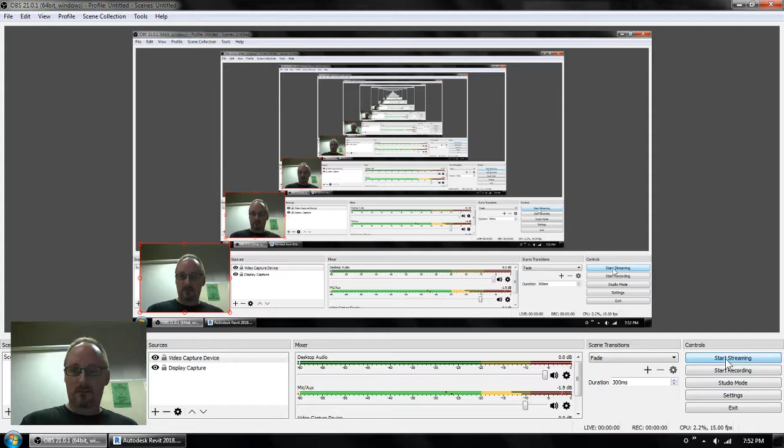In family types, we should have the metric and imperial level types created. And now we can go on to build the graphics. So if you haven't done that yet, you hit the new family types button here, and you're creating an imperial level type that has... so you have the imperial level type that's got the imperial level box checked, and then you have the metric level type which has the imperial level box unchecked, and metric will automatically be checked because of this formula.

All right, so hit OK, and now what we're going to do is build the graphic to the right of these labels. So if you look at the bottom of page 4, you can see what we're going to do. Now, while I am doing this, I'm going to go to the View tab, and I'm going to turn on Thin Lines mode. Now, I'll show you why.

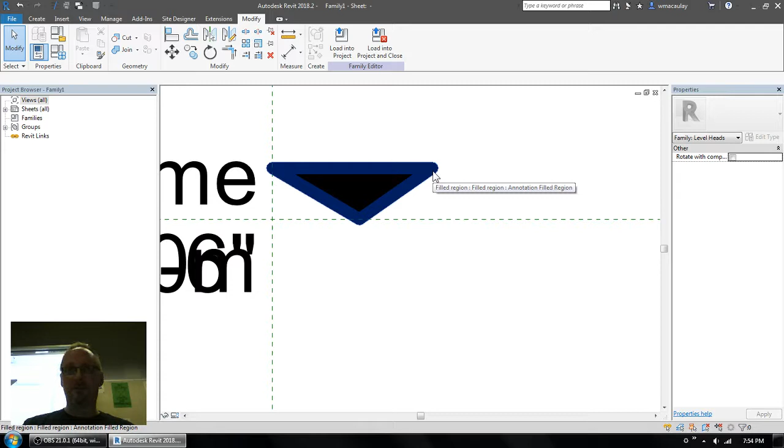The next thing we have to do, so just bear with me for a second here, keep your eyes on the screen. We're going to use the filled region command, and we're going to use the solid black filled region. But instead of level heads as the line style, we're going to use invisible lines. And here's why. If I make this triangle right now, you'll notice that the triangle has sort of rounded lines to it. And that's because when Revit does line work, it fillets based on the thickness of the line weight. Now, I don't want to fillet. I want that to be razor sharp, something you'd cut your finger on the end of it.

So what I'm going to do is, instead of using level heads as the line style, I'm going to use invisible lines. Now initially it's going to look just as blocky as the other ones, but when you finish, look at that. It's super sharp. But while you're drawing it, it does look pretty blocky, and that's a bit distracting. So what I can do is I can go to the View tab and turn on Thin Lines while I'm working on this. So as I'm working, we don't see any line weights, and everything just gets shown as a hairline. So let me show you the best way to get this drawn.

So go to the Create tab, start the Filled Region command, and then switch to the Invisible Lines subcategory for drawing these lines. Now we're going to draw the triangle first. We can't draw the triangle and a little bar at the same time, because the sketch lines would come to a point and Revit would freak out about that. So we have to draw the triangle and the little bar separately. So here's what we're going to do.

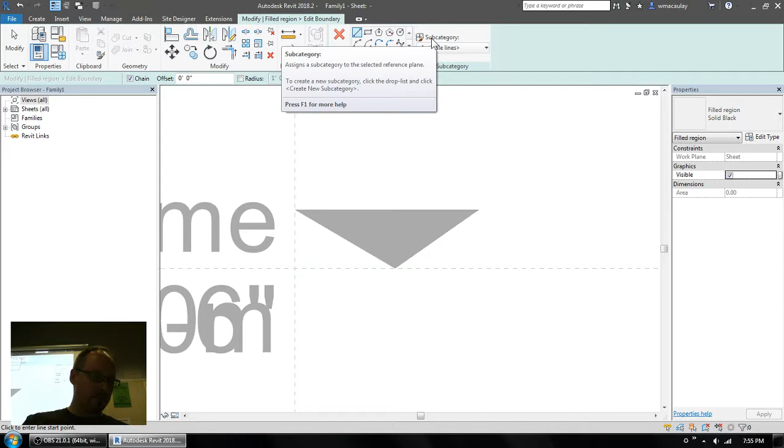We are going to switch to Invisible Lines, grab the Line tool, start right here at the intersection, and I'm going to draw up 1/8 of an inch, and then I'm going to come across 1/4 inch, so the reason I did this is just so that I'd have my triangle exactly where I want it. So I'm going to draw another line at the bottom across like so, and you'll see that it lines up. So I'm going to end up with a U-shaped series of these lines. So up 1/8 of an inch, over 1/4 of an inch, and then another one here at the bottom. Just allow me to snap to it.

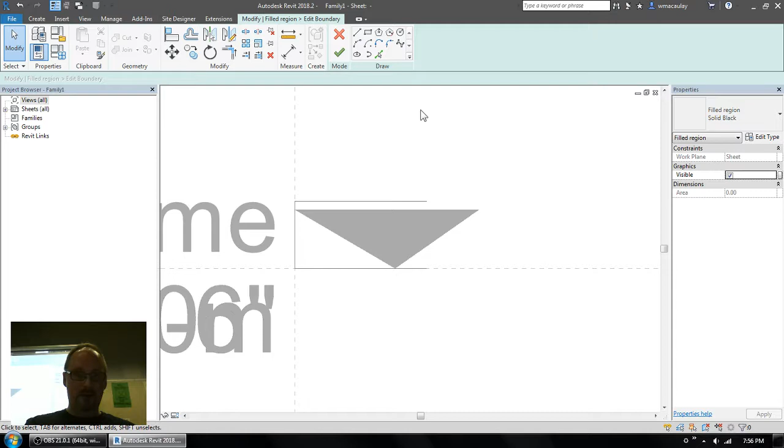So here I go. Now I'm really drawing the triangle from the end point to the midpoint, and then from the midpoint up to the corner of the triangle, and then I'm going to delete these other 2 lines, which were just there as construction lines to help me get started. So that's what we want to end up with. Invisible lines, and I changed to Thin Lines mode as well. So on the View tab, I've got Thin Lines turned on, and then when I'm drawing the filled region, I'm using the Invisible Lines subcategory.

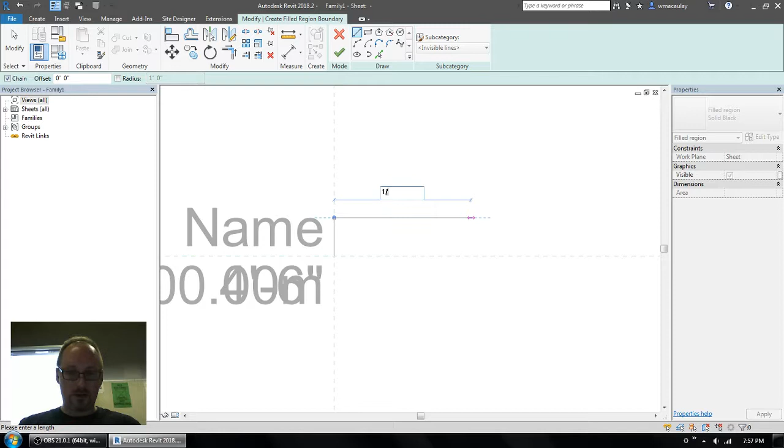So here I'll start right from scratch. So I'm going to draw from the intersection of the two reference planes. I'm going to go up 1/8 of an inch. Then I'm going to come over 1/4 inch. There we go. And I'm going to hit escape once, just once, because I'm still wanting to use lines. And I'm going to start at the intersection of two reference planes again and come over again 1/4 inch. Now the reason I'm doing this is I wanted to get these two construction lines in place so that when I draw the triangle, I'll have a midpoint that I can snap to.

There we go. And then I'm going to delete those two construction lines and finish. And there's my nice sharp graphic for a triangle, because I'm using invisible lines for the boundary edges of this solid hatched area. And then just draw the rectangle at the bottom, which will be quite easy.

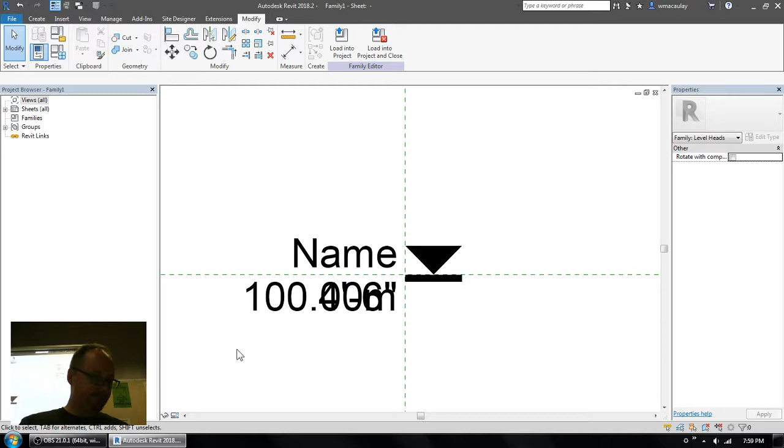Okay, so once this is done, you should have what you see up here, and we're going to save this as my level head. And so, bottom of page 4, please, we're going to put this into a project. So I've called it my level head and I've saved it.

So now what we need to do is use this in a real project. So just type Control N on your computer, and from the dialog that pops up, choose the architectural template. So Control N, and then choose architectural template out of the menu, and hit OK.

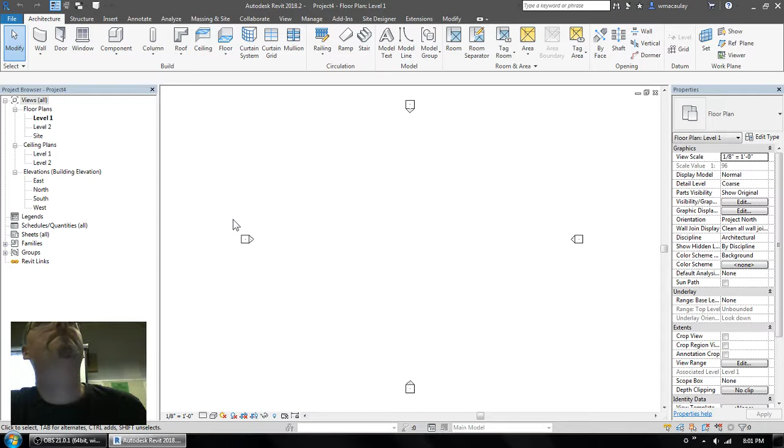Yeah. You can't. Revit, the shortest segment that Revit will let you draw is 1/32 of an inch. 1/32 of an inch. Yeah. So we just save on the desktop as a... Yep, my level head. Yep.

All right, so I've got this new project here, and what I'm going to do is I'm going to switch to one of the elevation views here. So I'm going to use my graphic instead of the one that you see here. So what I need to do is get that level head family and load it in here. So I'm going to go to Insert and Load Family and get it off the desktop here where I've got it. So there's my level head. I'm going to load it in.

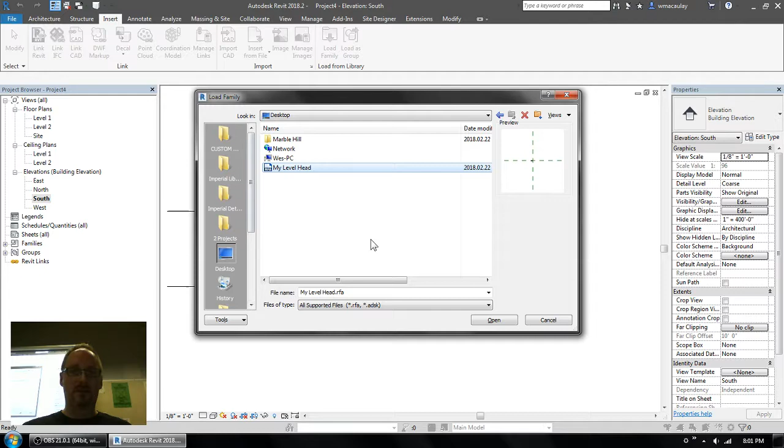So the level head is loaded, but it's not being used. So if I go into the families list and into annotation families, you will see my level head right there. So there's already 2 other level head families in this project which are probably being used. But at this point, we need to employ our newly loaded family here.

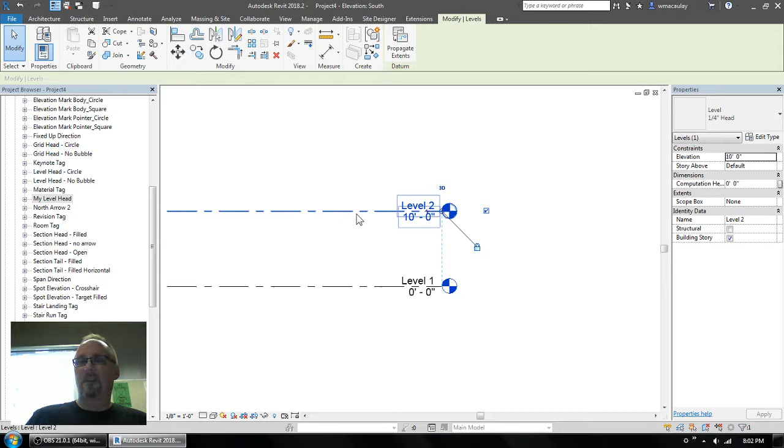So what I'm going to do is I'm going to go in and select one of these levels here. And we're going to make 2 level styles. One that shows metric, one that shows imperial. So first of all, we've already got an imperial level style here. So I'm going to go to Edit Type, and I'm going to rename this to Imperial Level. So I'm renaming the 1/4 inch head level style, and I'm renaming it to Imperial Level.

Now that I've done that, in the symbol parameter here, I'm going to go and find my level head right here, and we've already got one that's named Imperial Level, so when I choose this one and hit OK, our new graphic appears in its place.

Now what we also want to do is to have a metric version of this level. So what we're going to do, select one of those levels again in your view, go find Edit Type, and we're going to make a duplicate, and this one's going to be called Metric Level. So we've taken the Imperial Level and we've duplicated it, and we're going to call it Metric Level. For the Imperial one, we need to rename it, yes? Yeah, we do, just to help distinguish it one from the other.

So from the symbol field, it's still going to be the My Level Head family, but this time we're going to use the metric level type that we created inside the level head family. And hit OK. So now we have a metric level and we have an imperial level. So if we want our levels in the project to be in metric, there we go.

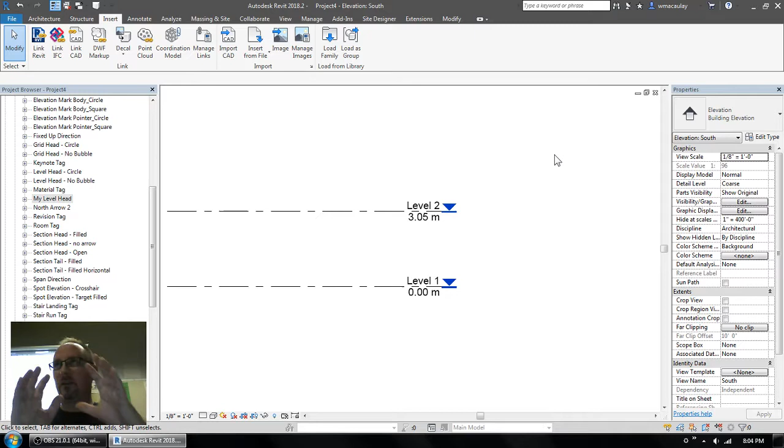Now, the purpose of this, folks, is to show you that you could, in the context of a single template, have a project that can be very readily switched into a metric style project using one family. So that one level head family is doing double duty. It's showing us meters when we want it to show meters, and it will show us feet and inches to the nearest 1/8 of an inch when we want it to do so.

So why do we go through all this trouble? Well, most commonly, when you do a project in metric, what basic unit do you use? Millimeters, right? So you usually use millimeters as the project unit, but commonly we don't use millimeters for the height of our levels, we use meters. It's more of an appropriate unit for the height of each story in our project.

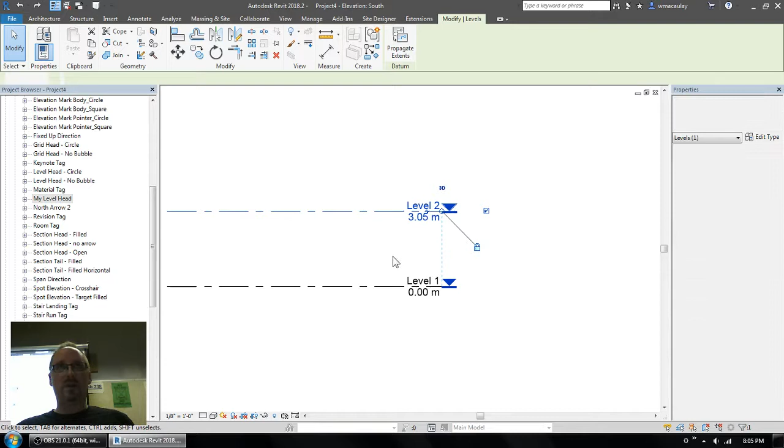So this means that if someone does switch the units of the project to millimeters, so here I go to Manage and then Project Units, and then switch it to millimeters here. So if the project gets switched to millimeters, the levels are still going to report their height in meters.

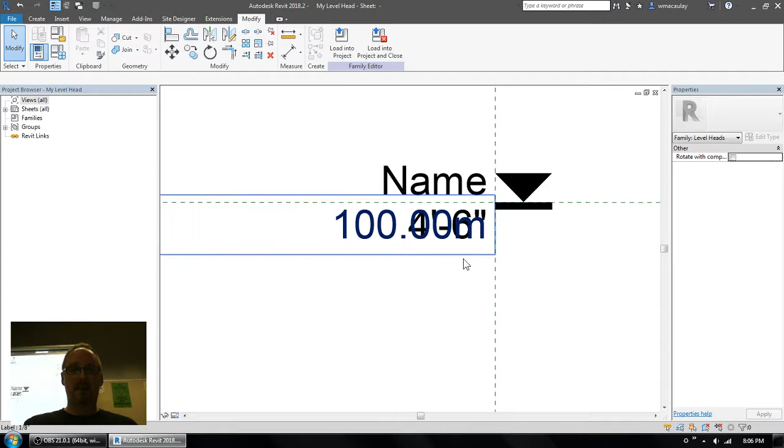So that's the intent. So most projects that I've seen report the height of their levels in meters. Now, of course, if you want it to report to 3 decimal places, what we'd have to do is go back to our family and then find our metric label here, go in and edit it, and change its units here to 3 decimal places instead of 2.

So if I change it to 3 and then load it back into my project, there you go. It shows 3 decimal places instead of 2. So that is something that's up to you. So if you want to, you can save, well, you need to save this in by next week's class.

Okay, we're going to move on. No, the project, because the family will be inside it. So here it says at the bottom of page 4, edit the levels type properties and change the symbol parameter to use this family, and then save the project as custom level head assignment in your share in folder. So that's that assignment done.

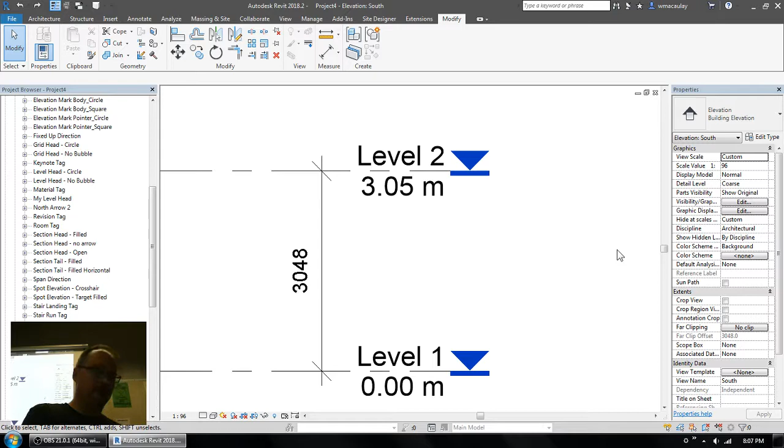Okay, I'll give you folks another minute or two just to wrap things up, and then we're going to move on to page 5. Okay, so what we're going to do is we're going to move on and talk about some of the other annotations that get used in your project. So close everything down to the Revit desktop so we can all start from scratch together. So save everything and then just go back down to the Revit desktop so we can all start from scratch using the architectural template.

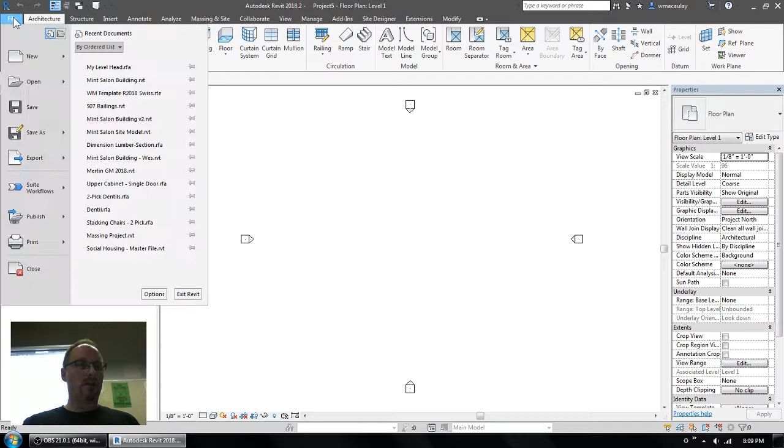Now, when you're trying to create the custom graphics for your office, what most people find is the easiest way to go is to start with your architectural template and then modify it to your requirements. So what I'll do here is I've got this architectural template open, and to start this whole process off, I'm going to go to the File menu, Save As, and Template. So this will be the ongoing project that you would embark upon to create your office's own template.

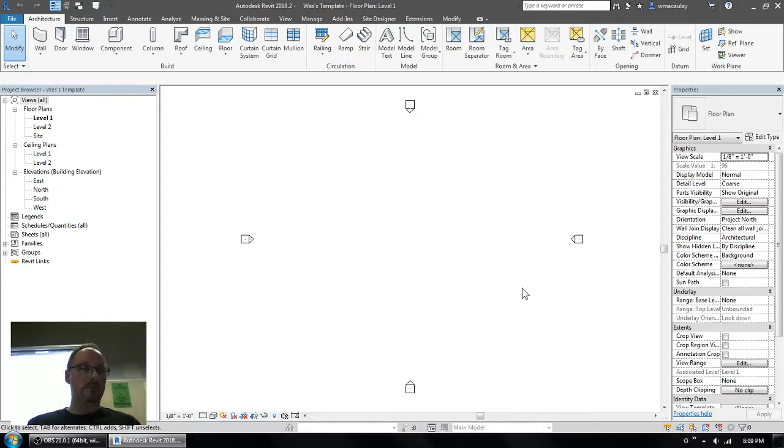So it might take you a few projects before you kind of figure out what you need to have in your template. But always have your template handy so that you can add stuff to it or make some modifications to it as time goes on. So typically what I have done when offices have needed me to get their graphics customized in the software is to take the families that are already here in the architectural template and modify them so that the office is happy with the appearance of these graphics. So let's look at grid heads on the top of page 5.

So when you use the grid tool, Revit creates a circle of a certain size and puts some text inside it. It's Arial font. All of Revit's graphics are based on the Arial typeface. So if you want to modify that, you have to address the family that's being used inside here. So if we go into the annotation symbols folder, we can go down and find the probable suspects in terms of how this grid bubble appears. So easiest thing to do, go into the template, find the family that's being used for the grid circle, right click and edit it.

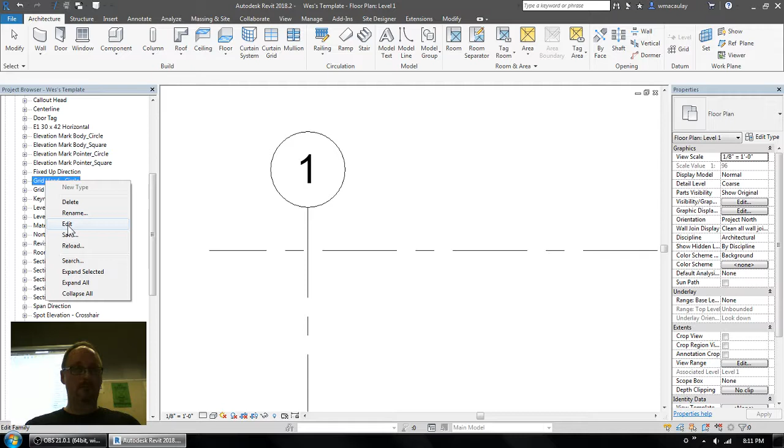Yeah, just open up the architectural template, and then I went down to the families folder, expanded it, found the annotation symbols folder, expanded it, and went down to the grid head circle family, right clicked on it and chose edit. So you folks can go ahead and do that. Now, when I make my grid bubbles, I like them to be noticeably heavier than the grid line. It just makes it easier to locate these grid heads in the drawings.

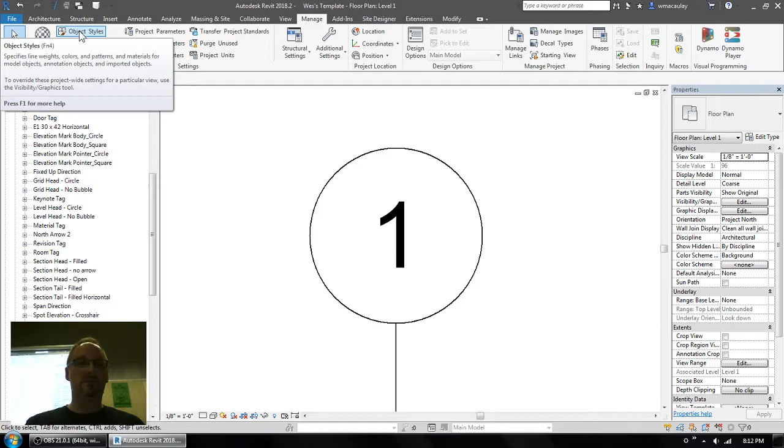So when I go and modify this grid now, this line around the outside, its line weight is driven by its subcategory. See it here? Grid heads. So if I were to go back and look in the project, I could find the line weight that's being used for grid heads. So I'm just going to tab back to the project here. So the line weight of your grid heads is controlled in object styles. Manage, Object Styles. So if I want to change the line weight of my grid bubble, I go into object styles and find the annotation tab, and then down under grid heads, you can see here, I'll change it to a line weight of 3.

So now you can see my grid heads have just a slightly heavier line weight, and I just find that when you look at a set of drawings and you see that little bit of extra line weight there, it just shows a little bit of attention to detail in terms of your graphics. Now, back when we're editing the grid head, the family itself also has object styles. So when I'm editing my annotations, if I go to the Manage tab, your families also have an Object Styles dialog box. But here's the thing.

If inside your grid head family, I went to Object Styles and I changed the line weight here and hit OK, you can see the line weight gets thicker around the edge of my grid number. But if I load this back into the project, it's not going to change the line weights. So here, I'm going to make it really quite thick, like a 6.

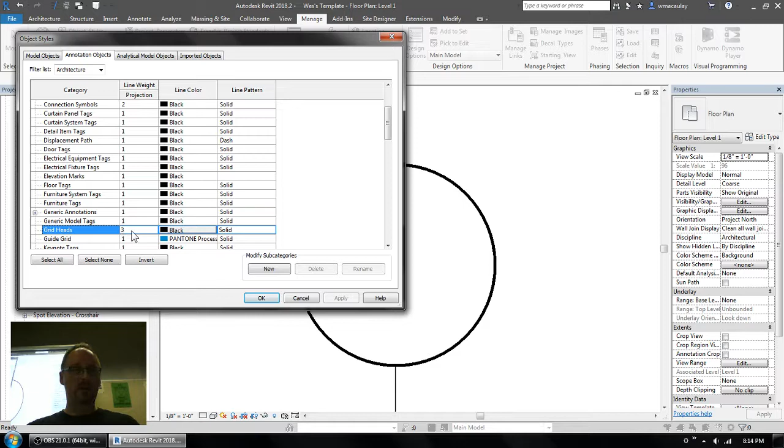Really thick. But when I load this back into the project, nothing changes. So what happens is the subcategory is still here in the project. So in my project, when I go to Object Styles and then I go to the Annotation Objects tab and then go down to Grid Heads, it didn't change it here. So just remember, if you want to change something, a line weight or something, you've got to do it in your project, not in the family.

So if you want to change something with your grid head, typically what you'll end up doing is maybe changing the radius of the circle. So you might find that 1/2 inch is too big a diameter. So if you want to make it a little bit smaller, you can. And then of course you can choose a different typeface and a different size for the text if you feel like this is too large.

So that font I told you folks about tonight, technical. So I can go in here into technical and I'm going to make it bold. So now I've got a technical font that's being used, and if I load this back into the project, instead of being Arial now, it's going to use that technical font for all of my grids.

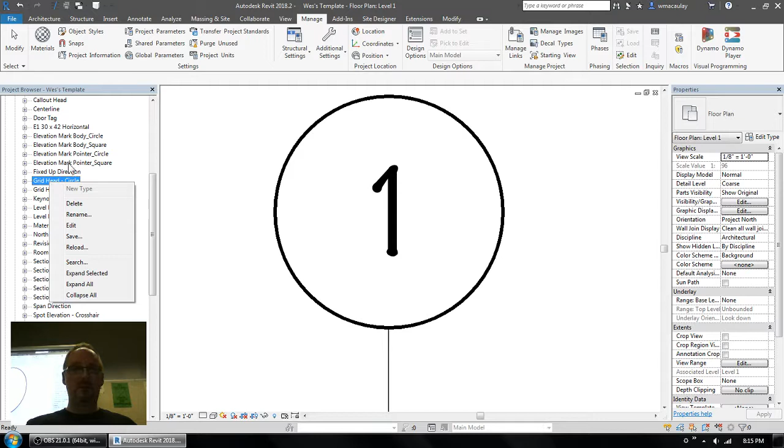So you save your template, you got it ready to go, you edit the families sort of one at a time, make the changes you want, then load them back into your project and redefine the version of them that's in your template that you're developing. So you just kind of work your way down the list, and it's something that you do over a series of weeks. You don't have to really rush into it.

So grid heads are what we call a loaded family, where you load the grid head into your project, and then in the type properties of your grids, there's the symbol that's being used. So grid heads and level heads fall into this category. Now, section heads are the next thing that we're going to look at here. Now, you can see here we've got the section head filled family. It's in the list underneath annotation symbols.

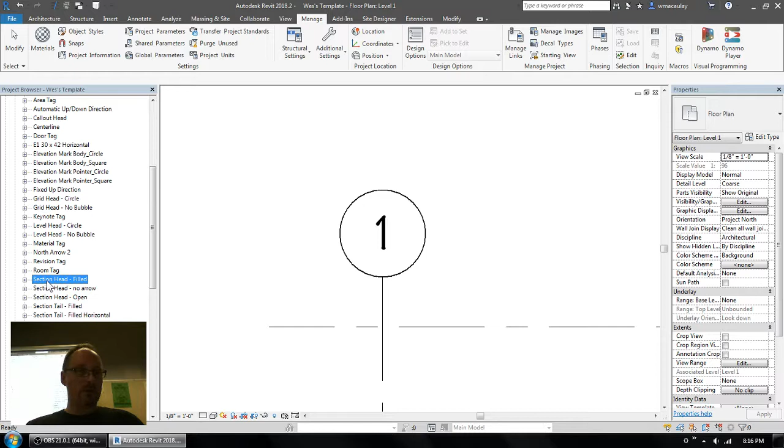And so there is a special template for building section heads, but don't even bother with the template. Just start with the out-of-the-box section head that's here, right-click on it, and edit it. So here's the out-of-the-box template. If you look on the notes on page 5, you can see that the section head that I'm showing here has some extra reference planes that are turned on, and we should do that here as well. So on the Annotation Categories tab, the reference planes category was turned off. So now we're kind of seeing what we saw in the notes.

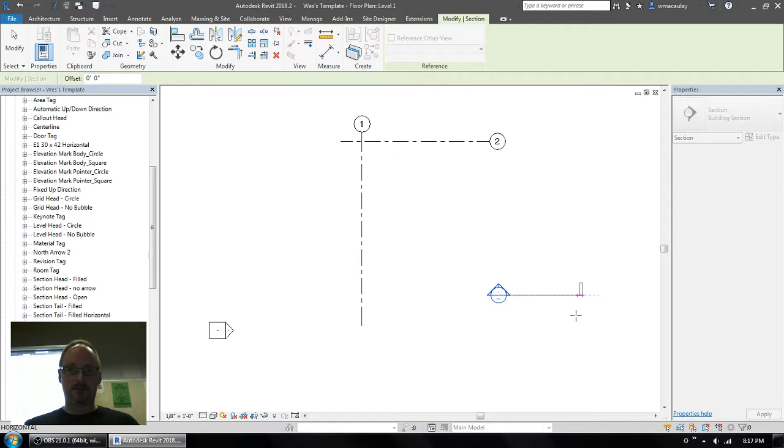Now, there's a little bit of magic in the way Revit works with these section heads. When you make a section in Revit, the software keeps the text inside the circle horizontal with the drawing area. So just to prove the point, if I draw a section on the screen, look at the center part of the section. See, it's keeping that line horizontal, and it's keeping the text oriented in a major axis of the screen, regardless of the angle that I draw the section on.

But you can see the section head rotates per the direction of the section. So when you're making your section head here, just know that anything inside the circle doesn't move, the text doesn't rotate, but the other graphics do. Now, if you want to make the section head larger or smaller, just have a look at the text. If you are creating your own section head, adjust the left vertical reference plane so the section line will connect at the right location.

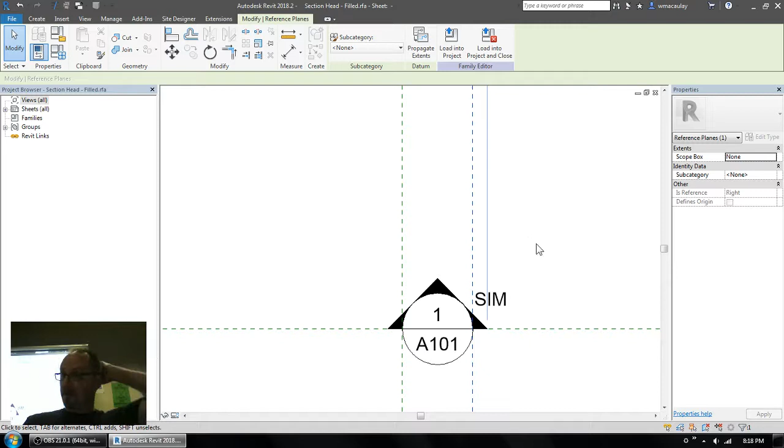So what this means is you're not supposed to move the right reference plane. It's just kind of a weird thing. So if you want to make your section graphic, your section marker, larger or smaller, you must move the left reference plane sideways to adjust to the new size. So here, I'll even show here, if we use the Revit template for the section head, right here.

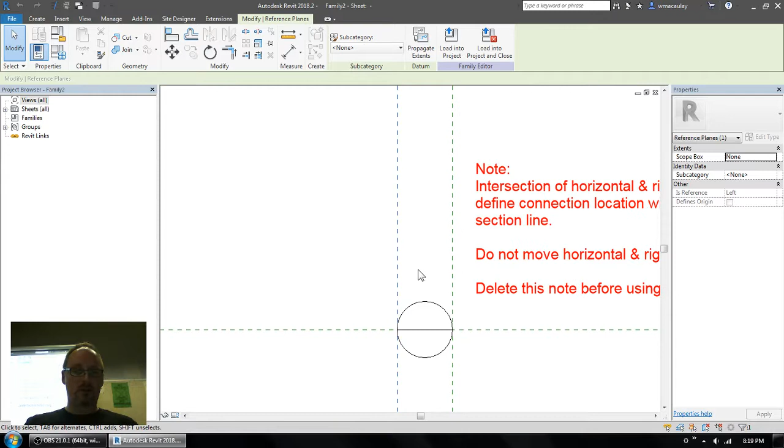Do not move the horizontal or the right reference plane. So that means don't move this one and don't move this one, but you can move the one on the left. So when you go back and look at the one that Revit provides, you don't move the right one or the horizontal one. Now you can see here that there's some text here that's called sim. That means similar. So that is the text that appears if you were making a similar type section in the software.

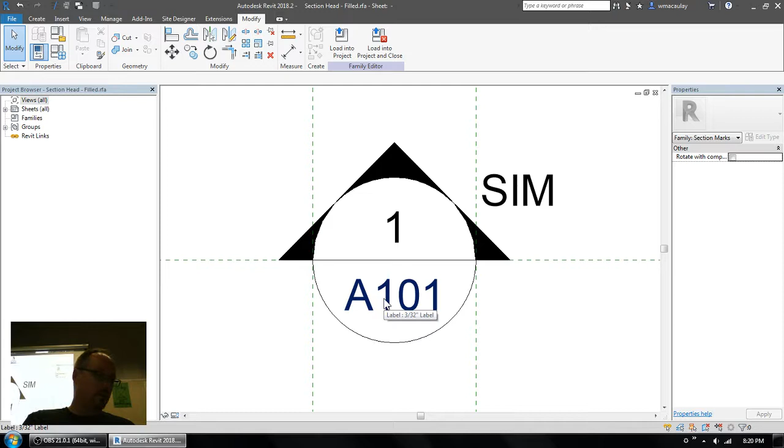So you can see that the section head I've got there has got a little bit of a heavier boundary for the circle, and I've used a couple of different weights of the fonts, a sans serif font, so that my text below is a little bit lighter for my page number, and the text above for the section number is a little bit heavier.

So again, just as you need to make this thing a little bit larger, so let's say I want to make this section head just a touch smaller. So what I do if I want to make this just a touch smaller, like I'm doing here, is I would take all of my text and the circle here, and I would move them to the right reference plane. Like so. I had to do that double move because it was less than 1/32 of an inch.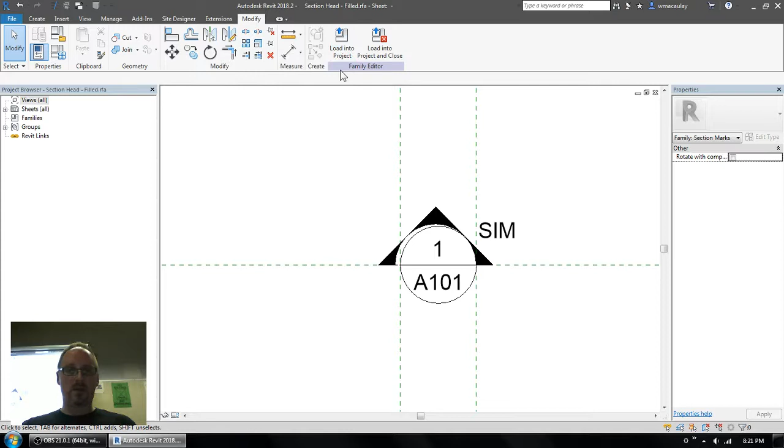So then I would move my reference plane over here, and then I have to adjust my filled regions to suit. So that's what I would do to make this bigger or smaller. So the left one moves, the right one stays where it is, and then I'd load it back into the project when I'm done. Enough about section heads.

So continuing on with how we would modify everything in the template, you can either start with the callout head template, or you can modify the existing callout head that's in the architectural template, and whatever modifications you made to the section head for fonts and the line weights and stuff, you would do the same to your callout head.

Now have a look at the callout head and the section head. You can see how the circle around the outside is a heavier line weight than the line in the middle. So to facilitate that, you have to use two different subcategories. See how the circle is callout heads? Line in the middle is callout heads. That means they both have to have the same line weight. So if I want to have a heavier line weight for the outside here, I need to make a new subcategory. So on the Manage tab, I will choose Object Styles.

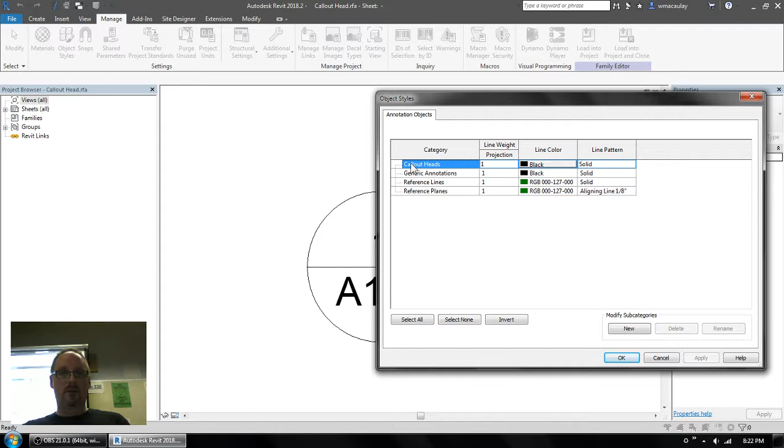And right now, this family does not have any subcategories. So I click on Callout Heads, and I make a new one. I'll call this Medium Lines, because it's going to be a line weight of 3, and give it a line weight of 3 and hit OK. So now I would pick the circle on the outside and assign those circle pieces to the medium lines subcategory.

Now you can see I've got that heavier line on the outside, and I would for sure play with the fonts, get everything a little bit more nicely centered, and then I could reload this back into my project and I'll get the extra heavier line weight there. So when I do a callout now, you folks can see that I've got that heavier line weight around the edge of my callout head because I redefined it from the architectural template, modified it, and then loaded it back into my template.

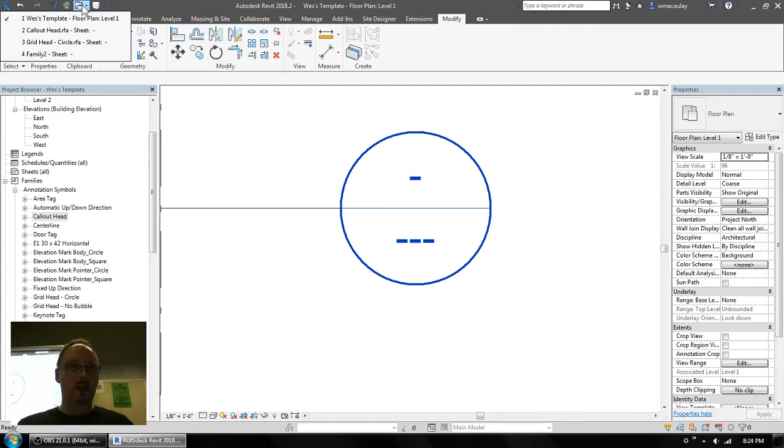I see on page 5 that I did it a different way around. So let me just talk about that. In the notes on page 5, the strategy that I used instead was to keep the boundary around the edge in the callout heads style, but instead in object styles to create a subcategory called thin lines that will have a line weight of 1.

So now that that's been done, what I would do in this case is that the line in the middle would be thin lines, and the boundary circle would be callout heads. So now when I load this into my project, to get the heavy boundary around the edge, I have to change object styles here in the project. So just like with grid heads, where I made it a 3, I'm going to do the same with my callout heads.

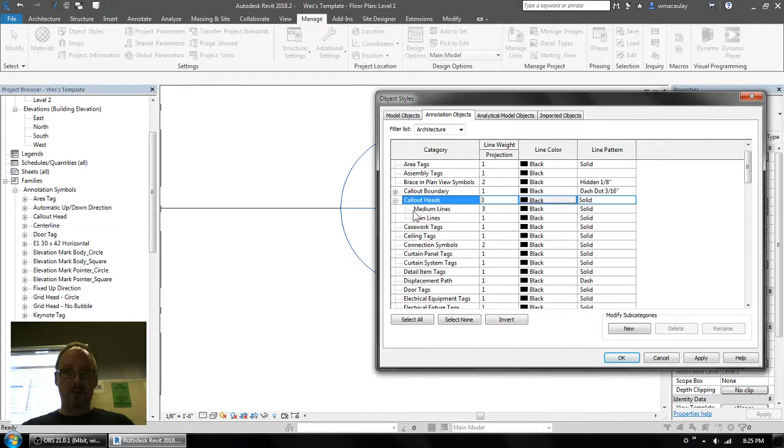And you'll now see that there is a thin lines subcategory. And now my callout head is thickened up. Now you might have noticed as well in object styles here in the project that that old subcategory I added, medium lines for callout heads, even though there are no medium lines in this family anymore, it's still here. It's like a leftover layer from a block.

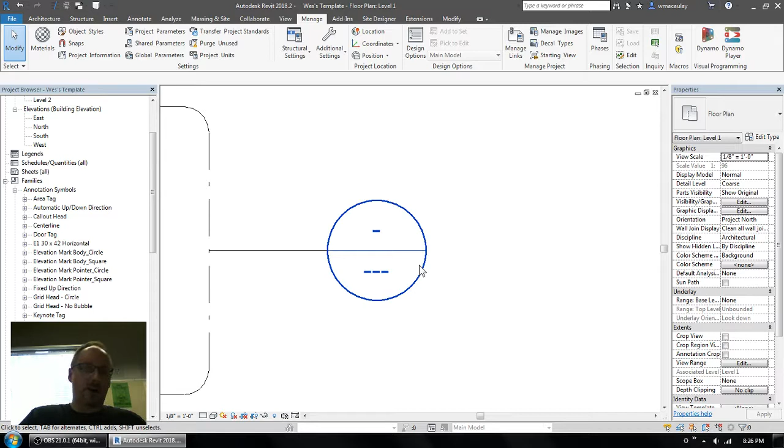So in your project you can delete those subcategories that aren't being used. It's not going to make any difference because there's no graphics inside my callout head that are making use of that subcategory. Okay, so let's go over to page 6. So what we're going to show you now is how to customize your callout, elevation and section graphics. Now Revit has a very convoluted method of defining these graphics in your project.

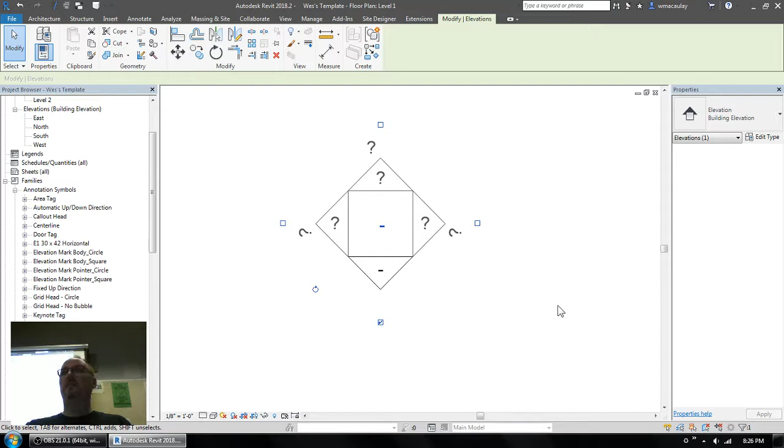So let's start with the elevations. So you can see the little elevation symbol on page 6 there, tag created and loaded into the project. Now, there's the elevation tag right there. So that symbol that you see on the screen, this box with the triangles that can be found around it, this is a nested family, as we will see in a few minutes. Here it is here.

So this tag, the elevation tag with all the little pointers around it, is loaded into a project. So that's step 1. So that is listed here as elevation mark body square. So that is the family that will be used. Now, if you just load an elevation symbol into your project, you'll never see it. Because once you've loaded an elevation symbol into your project, you must then have a tag that refers back to the loaded family. Now you guys know you've got door tags and wall tags, right?

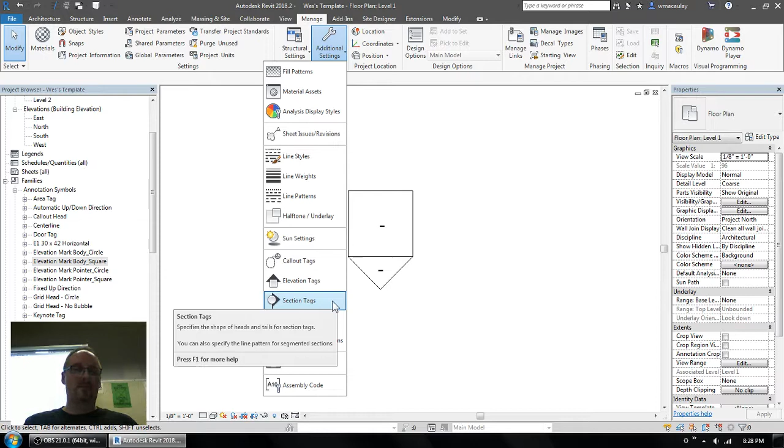Elevation, section, and callout tags don't actually exist. It's just a dialog box. So what we need to do is go to the Manage tab and go to Additional Settings, and you'll see here these three different kinds of tags. So whereas a wall tag is the symbol that you have when you tag a wall, and you've got a door tag and a window tag, you guys know what those all are. Callout, elevation and section tags are a dialog box. So let's stick with the elevation tags here. This is an elevation tag. It's a dialog box.

Okay, I'm Protestant, so I don't want to make fun of Catholics, but this is purgatory. It's the halfway between the tag and its final destination, which is an elevation style. So it's this halfway point. So the elevation tag simply records the family that's being used for this tag. It's the craziest bit of code I've ever seen in a piece of software.

It literally does nothing. You got any Star Trek fans here? Am I the only Star Trek fan here? There were the panels on the outside on the corridors in the Enterprise. I can't remember which series it was, and they were labeled GNDN. And somebody asked, what does that mean? Goes nowhere, does nothing. That's what this dialog box is.

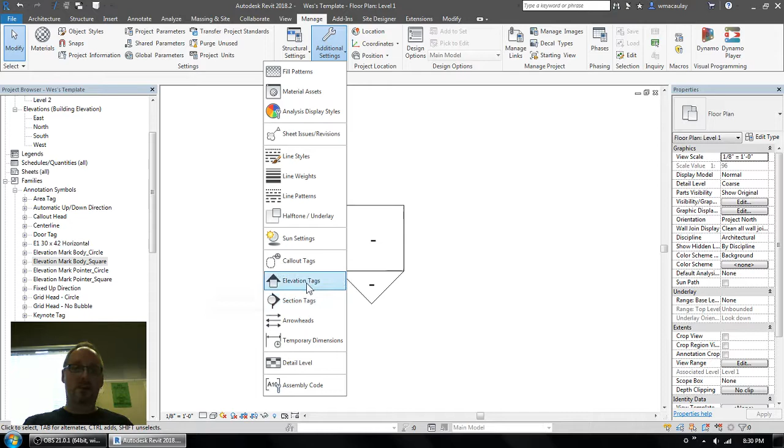It just sits here and records the family that's being loaded into the project as an elevation tag called half-inch square. Now what? Well, this tag, now that it refers to the family that you loaded in, can in turn be used by an elevation style. And this is horrible. I always apologize to my classes when I teach this part because it's a terribly awkward aspect of the software. So you load the family into your project, then you go to the Additional Settings dialog box, and you go to Elevation Tags, and you make sure that you've got a tag that's pointing to the family that you've loaded, right here. And then you hit OK.

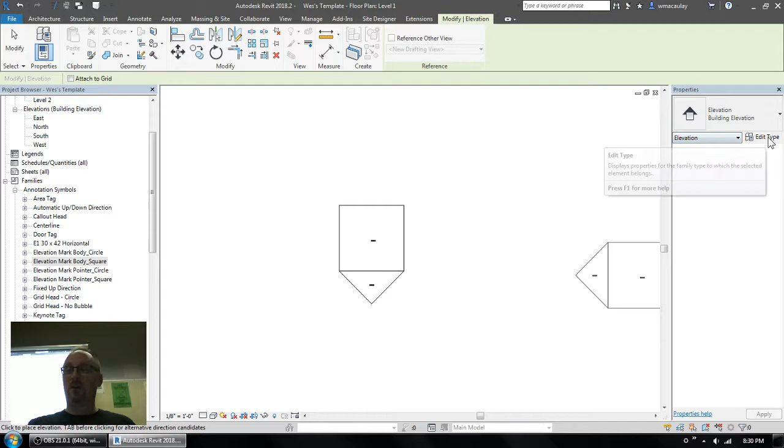Now even at this point, your elevation tag might not necessarily be used because you need to make sure that your elevation tool, so when I start up the elevation command, here's an elevation type. There's two different elevation types, interior and building. And each of these elevation types refers to, in its type properties, an elevation tag. So the elevation type refers to a tag. The tag, which you find in the Manage tab under Additional Settings, actually refers to the family.

So, yeah, exactly, right? What? No, if you were SpongeBob, your tongue would fall out and roll out into a 60-foot long carpet. You'd be like, what? Why? Why is this? I don't really know, folks. There's probably some reason in the code that this had to be done.

So there's that sort of three-step process, and it's the same for sections. So if I load this section head filled into the project, for it to be seen at the end of my section line, I have to go to Additional Settings, and I have to go to Section Tags, and I have to make sure that I have a section tag defined that picks up this family. So now that it does, excellent.

So I've got this one here. It's called section head filled, section tail filled. I'm going to make it easier for us to find it. I'm going to rename it and call it Bob. There we go. We have a section tag called Bob. Now, when I go and use the section tool now, before I even use it, I'm going to go over to the Properties box and look at the different section types that I have. I have detail, building, and wall.

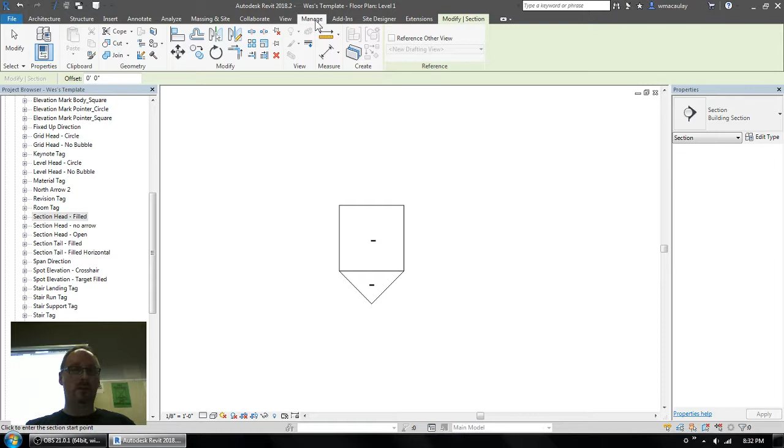Now each of these three different section styles uses, you guessed it, a section tag. There it is there. This uses a section tag, Bob. So the name of the tag, of course, is up to you. Now what I would actually suggest that you do with your section tags, and your elevation tags as well. This one has a section head filled and then a tail. So this is good for a... I'm going to rename it. I'll call it a partial section.

Now, I don't know how many of your offices where they have a head at each end for a full section. So you've got a section that goes right through the building. You have one of those circular heads at both ends of the section line. So I'm going to make one that is that. So I'm going to call this a full section. So this section tag is going to use the head at both ends. So at the head, it's going to have the filled head. And then same at the other end. So now I have a section tag called full section.

Now, I'm never going to see this tag in use unless I have a section style that makes use of this tag. So I've got this new section style here. So when I fire up the section command, and I go over my list of different kinds of sections that I have. Building section. Well, it's not using the full section one, it's using that partial section one. What does it look like? The partial section looks like this. It's got a head at one end, a tail at the other.

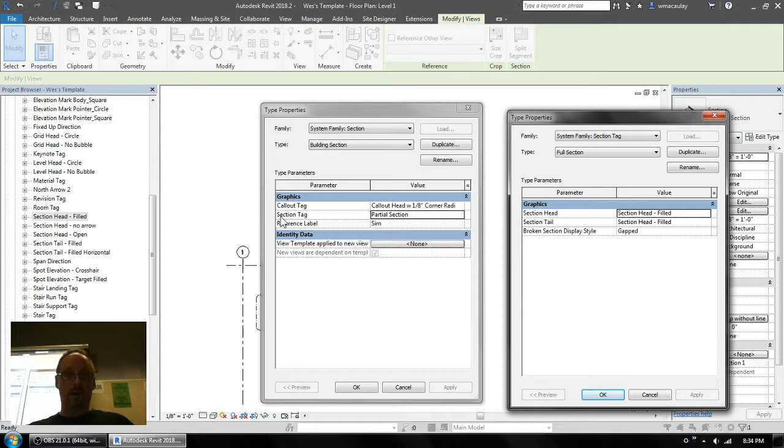Well, maybe I would like my building section to actually show heads at both ends. There. So now, instead of being partial section, it's going to be full section. And now I get a head at both ends. So it's kind of dawning on you now how this all works. So when you use any one of these tools, like you use the callout tool, and you go to the type properties here, and you look at the different kinds of callouts that you've got, the callout uses a callout tag.

So same with your elevations, view and elevation. So this elevation uses the half-inch square elevation tag. Now, you know what? I don't like this. This is an exterior elevation. Because I also have an interior elevation. So I'm going to have my elevation style that's called exterior elevation, and my elevation tag is a square. For an interior elevation, it's a circle. Some offices flip that around. You feel free to modify the graphics as you see fit.

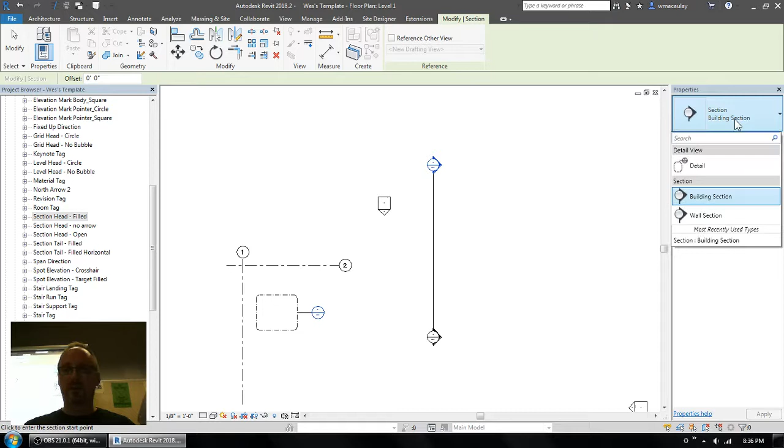So with callouts, sections, and elevations, it's a three-step process. You create the family, load it into your project, and then go into the appropriate tag dialog box and make sure that the tag is pointing to the right family. Then you have to go and use the appropriate view command, whether it's a section, callout, or an elevation, and just make sure that these different kinds of section, elevation, or callout styles are in turn referring to the right tag, which is in turn referring to the right family.

It's the most bass-backwards bit of user interface work that I've ever seen in my life, and it's part of the proof that I've drunk the Kool-Aid and joined the cult. So be that as it may, at least we can show you folks how it works.

Just before we move on to the next section here, I am going to point out again one of the things in Revit that you can paint yourself into a corner and really mess yourself up. It has to do with the callout tool. Now, I've mentioned this at various times during the intro course, and I'd like to go over it lots more times to make sure that you folks don't make this mistake. And it's only a limitation of the callout tool.

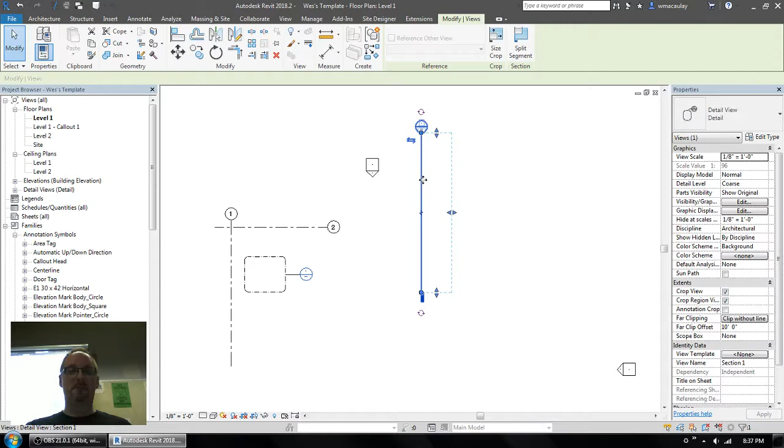Okay, if I've got a section, I can switch what kind of section style it is. So I can switch this from being a building section to a wall section. I can switch it from being a wall section to being a detail. Now, when that happens, you guys know that the view, so this is the one right here.

This one that I'm working on right now, this little section is called sample section view. I've just named it. And watch what folder Revit puts it into as I switch what kind of a section style it is. So here it says detail views, detail. I can switch it to building section, and look, it puts it into a different folder.

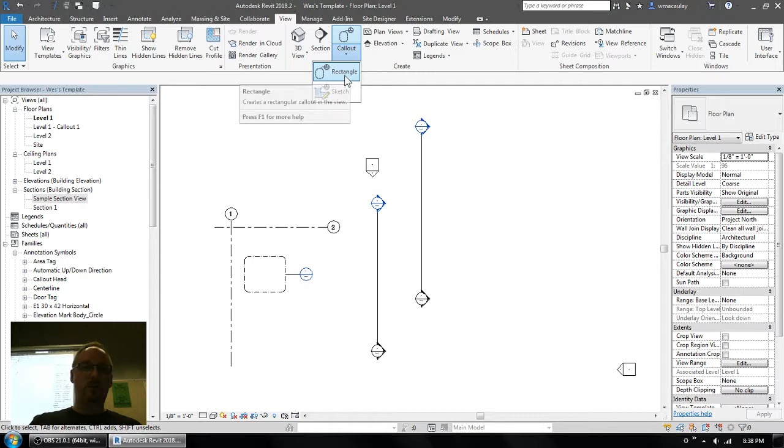So if I have other sections that I've drawn in the project, it's got folders for those sections as well. So when you've drawn a section or an elevation, you can switch it to any other kind of section style or elevation style, but not with callouts. This is big. When you use the callout tool, whatever you choose it to be at the beginning, a floor plan callout or a detail callout,

so it shall forevermore be. So if I create it as a floor plan callout, once I'm done, I can't switch it to a detail callout. Likewise, if I use the callout tool and I make it a detail and draw it as a detail, after that point, I can't switch it to a floor plan callout. And you're all like, why?

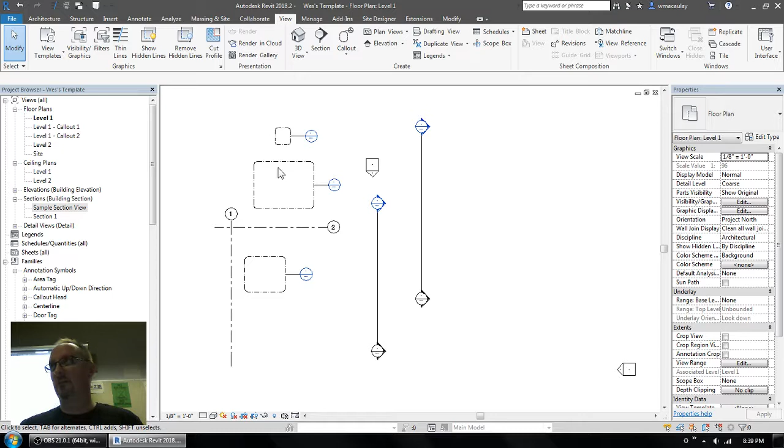Because the dude who coded this left the Revit development team in like 2008, and no one's touched his code since. Nobody wants to. It's no joke. So it's been stuck with that limitation in Revit for as long as I can remember. It's goofy and it's stupid and it is what it is.

Okay, over to page 8. So, just want to point out, I mentioned it to you earlier, that your elevation symbols are a nested family. The body, which is the little box that has the page number in the center, that is one family. Then the little pointer that's on the outside gets nested into the family where the box is.

So if you go down and look in the project browser, you're going to see these under annotation symbols, elevation mark body square, elevation mark body circle. Those are the center bits of your elevation symbols. So here, this is the elevation body family. The pointers on the outside are nested in. So if you want to customize the graphics, you got to go into this family here.

And then if you want to change the fonts, go ahead and do that. So you'd have to modify this family here, change the fonts and size if you want to, and then load it back into this family and then load this back into your project.

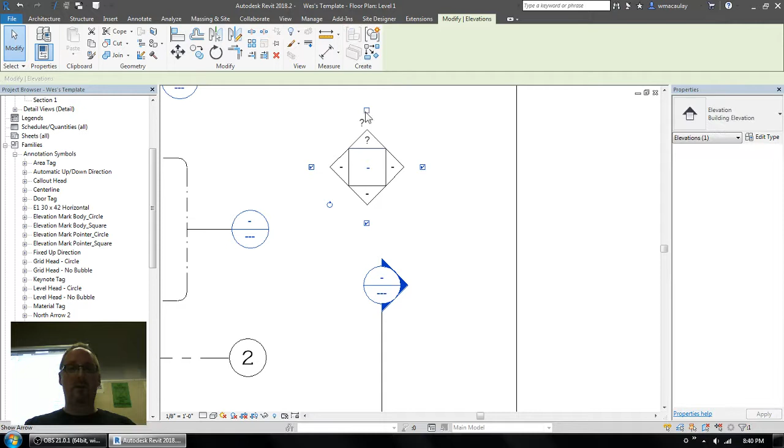Now, there's not much more that you have to do, because you guys know that when you put an elevation in Revit, you know how you hit these little boxes to add and remove those views, right? Revit just does that automatically. There's no special programming that you have to do. So each of the 4 nested families that are inside your elevation symbol when you build it, they just get turned off and on automatically. You don't have to do anything. You just put the families in there initially and it's all good.

Does anybody know one of the gotchas with these elevation tags? What's one thing you should not do when you're using an elevation tag? And it has to do with the views. And it has to do with the sheets that they are on. Anybody remember? Well, you can't have 2 views on the same elevation tag on separate sheets, because then Revit will not report a sheet number in the middle.

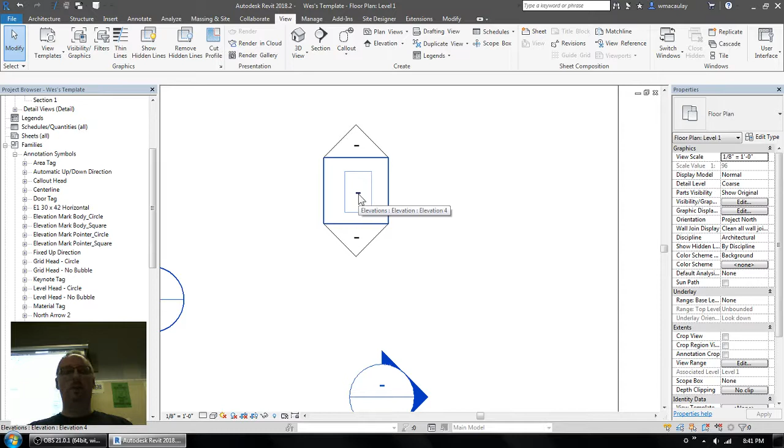It'll leave it blank. So if you are using one elevation tag, make sure that all the views that are being generated by this elevation tag, so in this case, all these 3 elevations, need to be on the same sheet. And if that can't happen, then you need to make another elevation view in a separate tag. So if this one view here had to be on a separate sheet, then you'd have to do something like this.

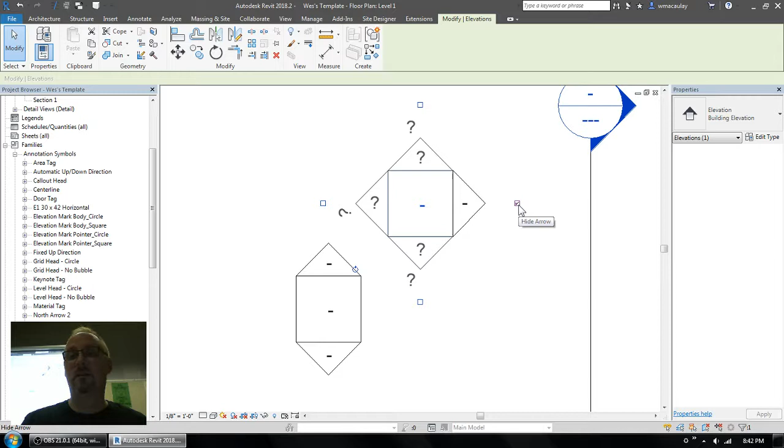Remember that whenever you uncheck a box, you're deleting the view. So if you put a whole bunch of text or dimensions in there, as soon as I click this, they're gone. So yeah, little word to the wise there. Okay, we have dealt with everything up to page 10.

So just in terms of getting started and creating your template file and then using it, you got to go into Revit's options dialog box so that you can point your staff or yourself to use this. So we got to go to the file menu, and then down to options. So here in the options dialog box under file locations, this is where you choose the different templates that Revit will see. The first template that you see in the list here will be the first one, or the automatically used one, when you start Revit up from scratch.

So here, if I close Revit right down, I'm just going to open up Revit again here. So now, when I open Revit up, that top template in the list will appear on the Revit desktop and will be the default template that gets opened when you hit File and then New.

Seems like every year Revit takes longer and longer to open up after you've closed it down. So here, when I hit New, Revit is starting with the first template in that list.

Okay. Well, no, not on my computer anyway. I think you folks might have the construction template. Oh, I do. But the list of templates that Revit shows in the options dialog box here, I could add more templates by hitting the plus, of course, and adding those extra templates to my view.

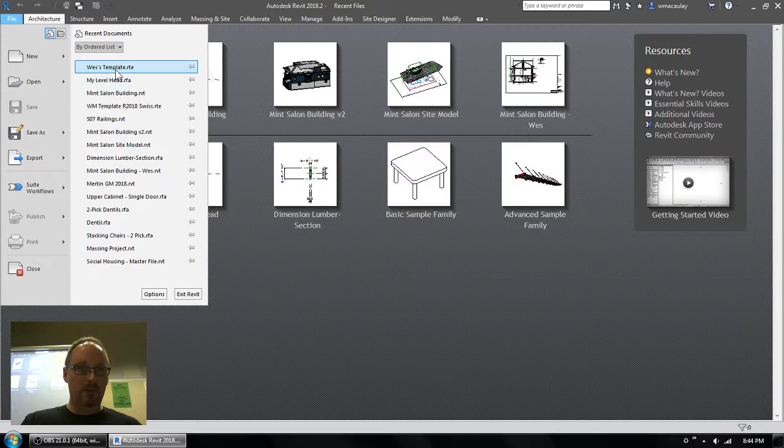Now, in terms of building a template, page 10, bringing in formatted schedules from a completed project. Now, so let's say here you're working on your template and you don't have a door schedule in your template yet. So you can see here, I do not have a door schedule yet. So a really neat way that you can add one from a project that you've already completed: create a new sheet in your template.

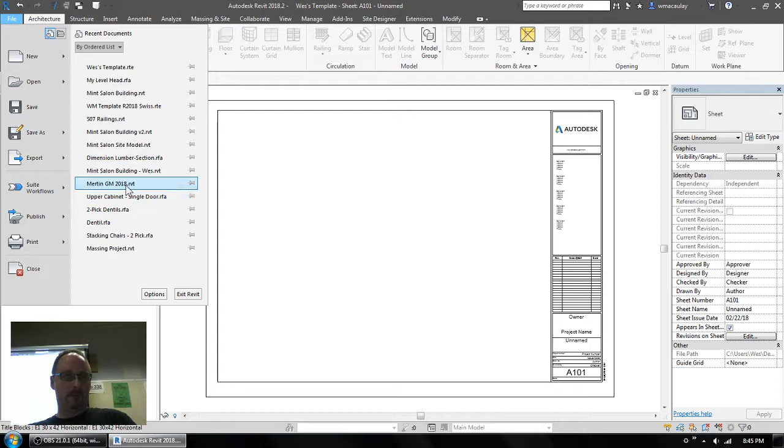Now once that sheet's created, what you need to do is copy a door schedule from a finished project on the sheet in the finished project and paste it into your title block on the template. You're like, what? Well, here, I'll show you. So here we've got a completed project with a fairly complicated door schedule. So you copy it from a sheet in the project to the sheet in the template.

So I'm going to go down to the sheet where the doors are being listed. So there's my door schedule. So I just Control C, copy that door schedule from my project where the project is largely done. Then I go back to a page in my template, here it is, and I Control V, paste it. So I'm just pasting that door schedule in.

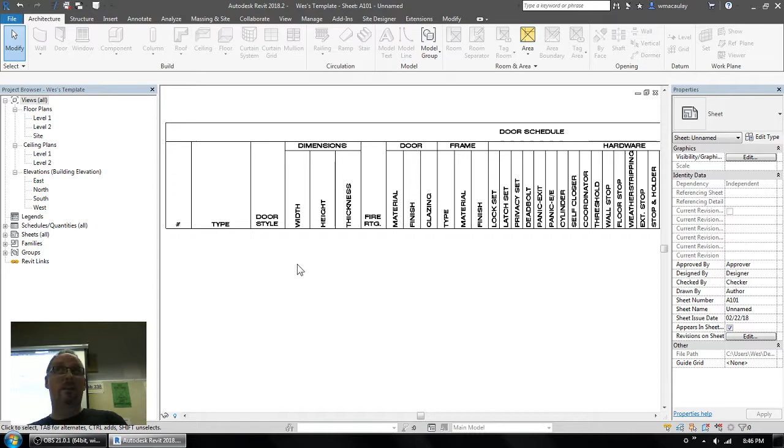Now of course there's no entries here yet. There's no doors in this project, but the schedule is here. So each time a new door gets added in the project, it'll get added to this schedule, and you'll see now that it added the door schedule from the project where I got it from. Pretty cool stuff. Okay.

I'm going to skip the customizing the project browser right now. We'll come back to that a little bit later. I'll skip the stuff about the general tab. You guys can learn about that later.

Very quick note here, just on hardware for your computer. When you go to Revit's options dialog box here, and you go to graphics, no, hardware. You want a computer that has what we call a video card. Now sometimes you'll buy a laptop or even a desktop that doesn't have a video card. So what that means is the graphics on your screen come from the motherboard on your computer or the motherboard on your laptop. Now motherboards are pretty good at connecting in your main processor, but they're not as good for putting the graphics up on your screen.

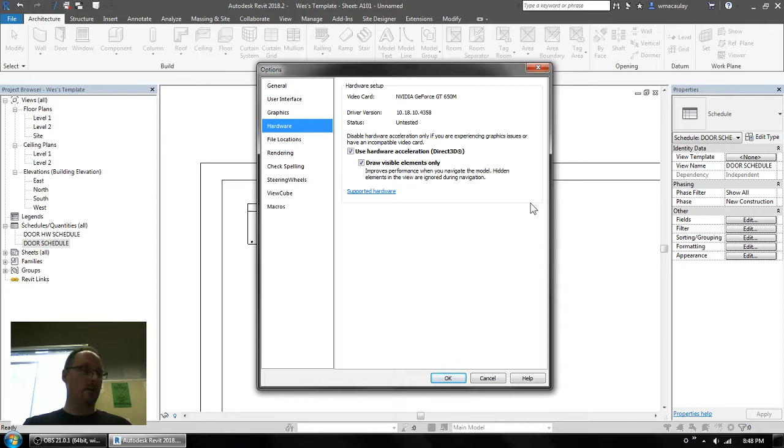So what you want to do when you're out buying a computer is you want to get a laptop or a desktop computer that has a separate video card. You will always get much better performance from Revit if you have a separate video card in your laptop or in your desktop. And so when you come to the hardware tab here, you want to make sure that you'll be able to see these check boxes. If you're using a computer that does not have good hardware in it, these boxes will not even be available to you. They'll be grayed out. On a big project, Revit can get quite slow unless you've got some dedicated hardware in your computer to handle things. Enough about that.

Okay, last thing that we're going to talk about tonight is title blocks and the revision schedule that's inside it. We'll just take a quick moment here to talk about keyboard shortcuts. So just go to page 12. Now, as I'm working away on the screen here, you've probably noticed that I do not go into the ribbon very much to find a command. In fact, it may look like I'm some sort of Revit ninja because it doesn't look like anything's happening. I just hit some buttons and stuff begins to happen on the screen. And that's just because keyboard shortcuts are always the fastest way to work.

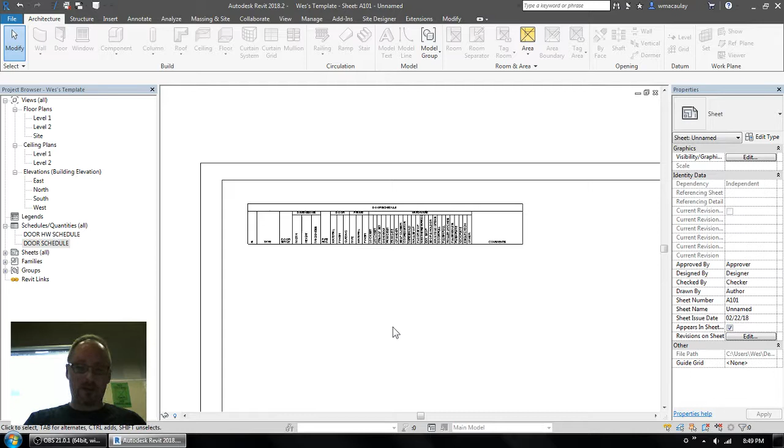The problem is being able to sometimes memorize what you had for your keyboard shortcuts. But if you type in KS, I've got a pretty long list of added commands that I put into Revit over the years just to make things a little bit faster. Now, Revit already has a pretty good list of shortcuts for things like walls. So when you put your cursor over the wall tool, you can see in brackets WA, and then for door, DR, and so on.

I can type WA and start the wall command, and I have a keyboard shortcut so I can switch to drawing a rectangle while I'm drawing my walls. So this means that instead of having to come up here and hit rectangle, I've got a keyboard shortcut that will allow me, while I'm drawing walls, to switch to rectangle mode or to draw a circle. So that's all in the keyboard shortcuts dialog box as well.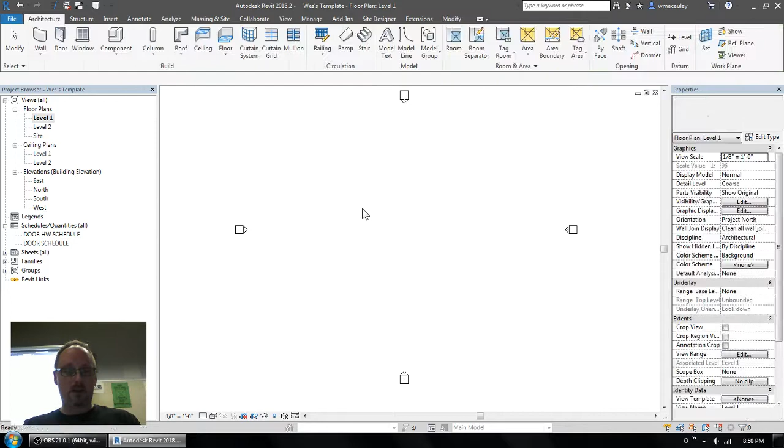So here I can ask Revit to draw a floor and then do 4 lines and then finish without ever having to go up and hit the finish. Instead of having to go up here and hit the green check mark, I've got a keyboard shortcut FE for finish edit. So I've tried to use keyboard shortcuts that make sense. So I type in FE and I'm done. So it's a nice way to speed things up so that you can be efficient.

If you want my keyboard shortcuts, I'm happy to give them to you. They also have a Word document that lists them all out, and they tend to be compatible with all the shortcuts that are in the software. So once you've got some keyboard shortcuts that you like, you can export them to an XML file, and then you can give that to a colleague or your friends, whoever else is using Revit with you.

All right, enough there. Let's talk about title blocks. Now, when you're using title blocks in your office, I'll give you a few good suggestions here. If you look on page 12, you'll see the same title block that we've got up here on the screen. So here is the title block family.

Now, how many people have used an HP plotter where they were hoping that the plot will come out widthwise in the plotter? Instead, the damn thing rotates 90 degrees and gives you a nice 12 or 24 inch white space on the side of the print that you have to trim off yourself later. Anybody? I've done that at least a couple hundred times. So you've got a 3 foot wide roller HP printer, and I've got a 3 foot wide sheet. Please print out the 3 foot wide sheet widthwise. And it took me a while until I realized what it is that these stupid plotters want.

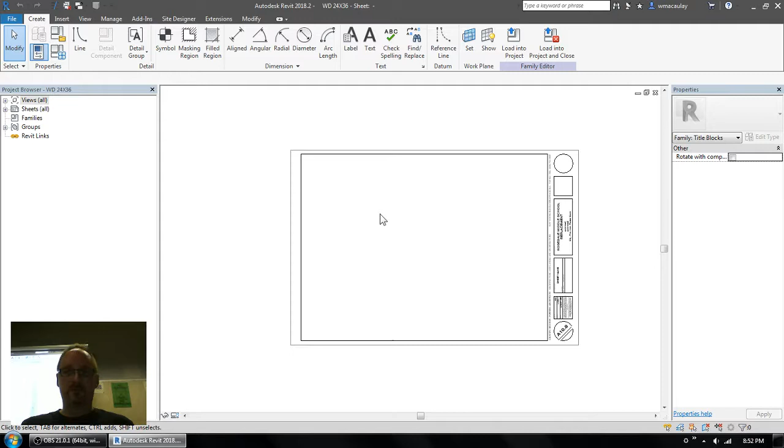Here's the secret. You need to know what the margins are on your plotter. How far to the edge of the sheet can your plotter handle? In most cases it's usually 3/4 inch on the leading edge, a 1/4 inch on the trailing edge and 1/2 inch on the sides, sometimes a bit less. Now, when you're making your own title block, here's a really big tip. Draw the exterior edges of the sheet to its actual size. So here I've got an Arch D title block, 36 by 24. These outer lines around the edges, I've changed them to the invisible lines style.

Now, what does this mean? It means when I use it in a project, when I mouse over the title block, I see these lines. See the title block there? Watch when I put my cursor on it. That allows me to see the ultimate edge of the sheet. But when I send the print job off to the plotter, those invisible lines don't go.

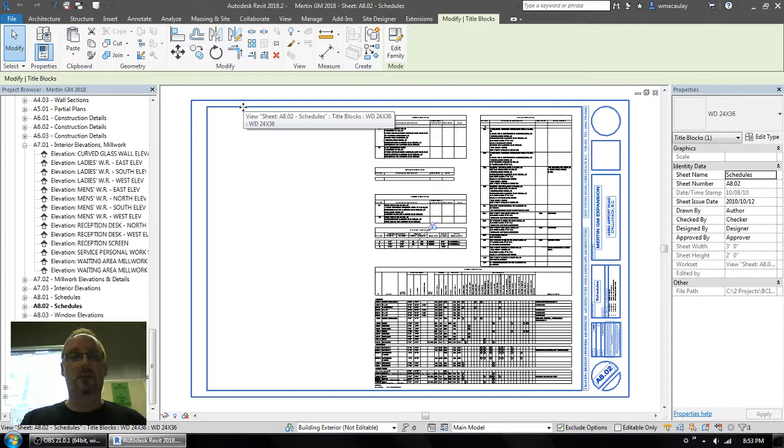So the mistake I was making earlier in my career is that when I was drawing the lines of my title block, I drew them right at the edge. So those lines got sent to the printer and the printer said, "Oh, you want to print those lines too? Well, shoot, I'm going to have to rotate the paper to make that work." If I'd made those invisible lines, it wouldn't have been a problem. So draw your title blocks at the paper's actual size with invisible lines, and then inset everything from there.

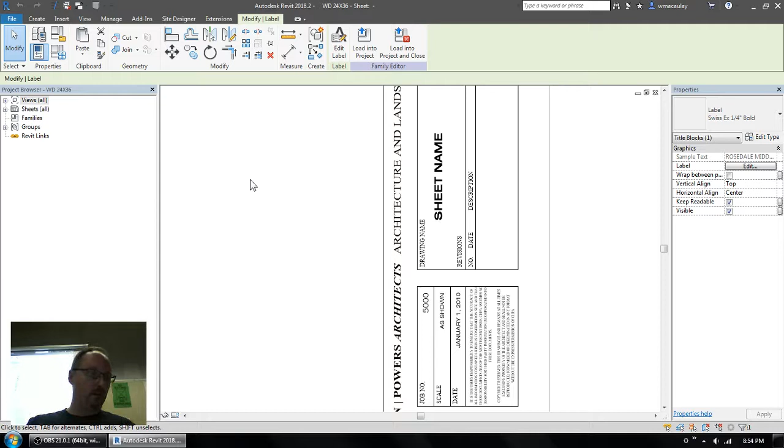Now, if you've got a company logo in a JPEG or PNG format, you can put that in at the top. And then it's just a case of putting in your labels for the project name, the project address, scale, and so on. That's all stuff you can figure out on your own. I want to talk about the revision schedule on page 13. This is something that tends to be a little more complicated.

Okay, so what I want you folks to see here is I have some revisions that are being shown here in a list on my title block. The list of revisions that you see here comes from a list of revisions that are defined in the project.

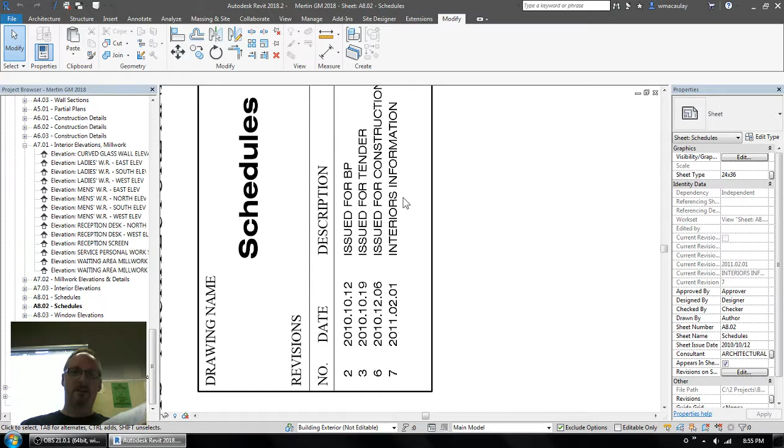So go to Manage, Additional Settings, Revisions. This is where you define the revisions for your project. And so here are all the different revisions that were used in this project. 7 revisions. Now, here's the cool thing about how Revit's revisions work.

If I am in a floor plan and a revision occurs, so on the Annotate tab, once you define your revisions on the Manage tab, you can go and use the Revision Cloud tool. So when you're using the Revision Cloud tool, in the Properties palette, you can choose which revision we're talking about here.

So if I've got this addendum here and I want to bubble off an area where this revision applies to, so maybe the sales office got added. So when I'm done, oh, it didn't show. I'll bet you that's because I've got it turned off. Yeah, it doesn't appear. So here, when you're done with the revision, later on you can hide it.

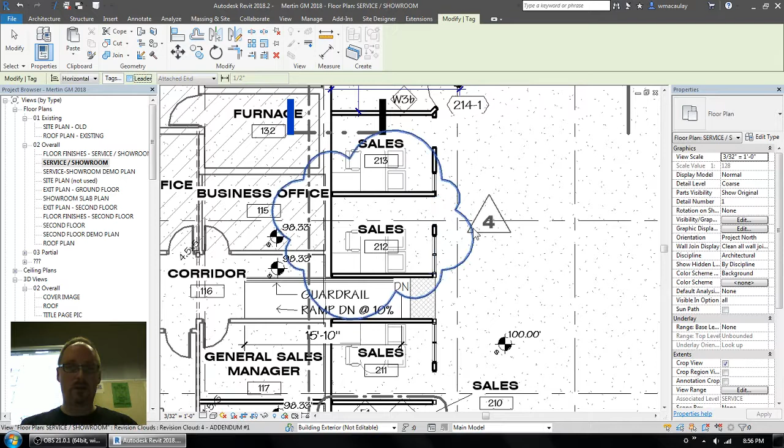So there we go. So now I can tag my revision. So this is revision 4. So I've got a nice little triangle there indicating that this revision is happening here. As soon as I cloud a revision in a drawing, the sheet that this drawing is on will automatically get that revision added to the sheet. So that's a really cool feature.

You cloud an area, throw that view on a sheet, boom, it will show up in the revision schedule on your sheet. So when this feature was added to Revit, I was like, that is stinking awesome. I'm going to add that to my template. So adding the bubbles in your view is easy. Adding the revision schedule to your title block is a little more difficult. So I'm going to walk you through that process.

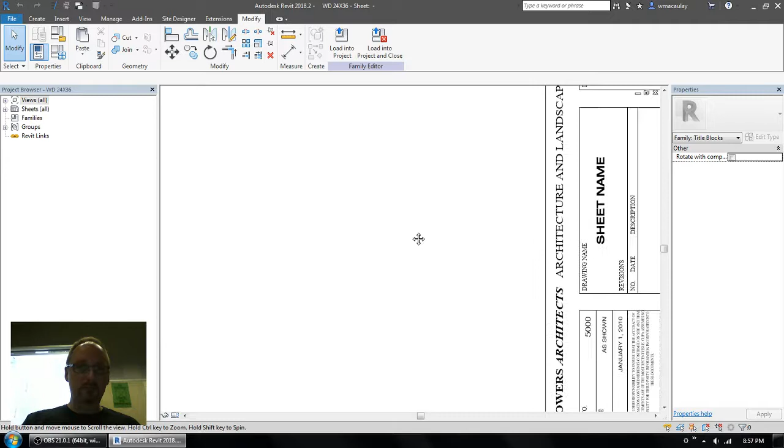So, to add a revision schedule to your project, you go to the View tab in your title block and you add a revision schedule. So now you need to decide what needs to be in the schedule. Now typically all you need is the number, date, and the description in that order. So you don't need the sequence usually. You need the number and the date and the description.

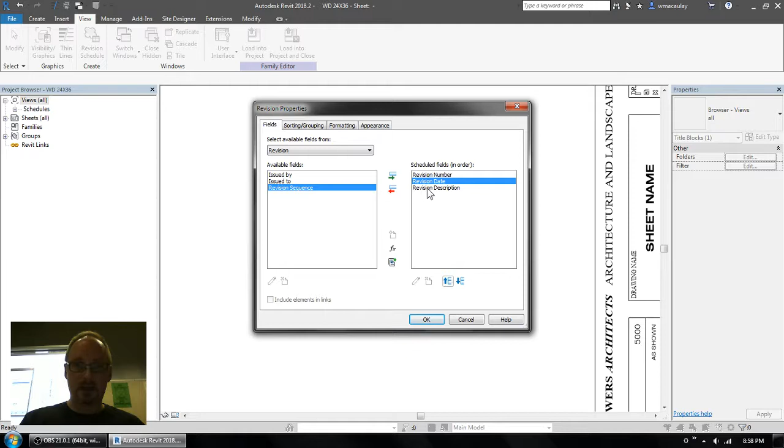Now here's the really weird thing. After you create this schedule, this is what it looks like. It'll show up in your project browser as revision schedule, and now what you need to do to have it show up on your title block is a really crazy part. Let's look at the second paragraph on page 13.

Once a schedule has been created, it will show up in the project browser under Schedules. Open the sheet view for the title block. It lists as a minus in the project browser under Sheets. How do you open the sheet view, folks? Look at this. You see a little minus there? Double click it.

That's why you come to this course. Can you imagine trying to be the poor sucker? It's like, where do I find the sheet? Oh, you double click the minus. You double click something which means nothing or less than nothing.

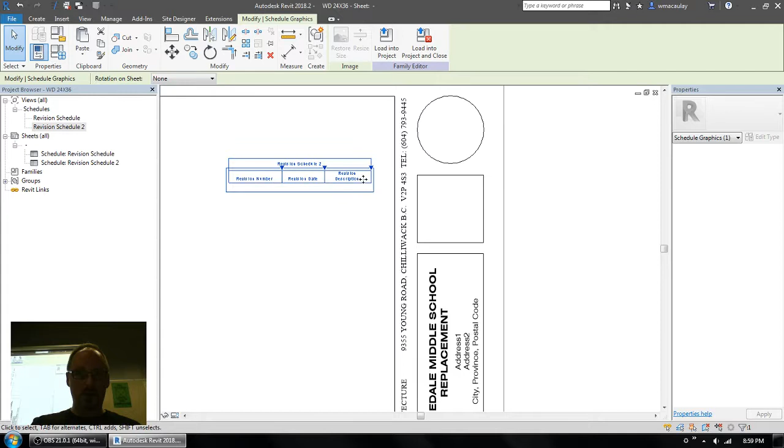Oh, that's intuitive. So you drag and drop the revision schedule into the view. So there you go. Now, if you don't want these headings to appear, it's up to you. You can decide whether you want them to appear or not. And you can decide whether you want it titled or not. So what we did with ours is that our revision schedule has no title and it has no heading columns either. So this one here, this revision schedule, that's it.

It's blank. But then what we did is we asked it to be rotated sideways. So after we put it in place, we grabbed the rotate command and we rotated it. Oh no, it wasn't there. There was another thing we did. Where is it here? Rotation on sheet, there it is. So once the schedule's on the sheet, you can rotate it counterclockwise, and that's where our revision schedule sits down here.

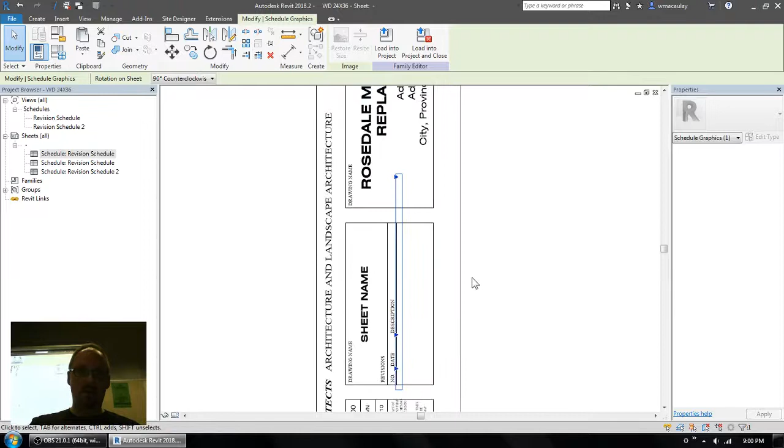So yes, it's a little bit of fussing about to create it initially, but once you've added it to your title block, and you've added the title block to your template, it's an amazing feature that's definitely worth having in your template.